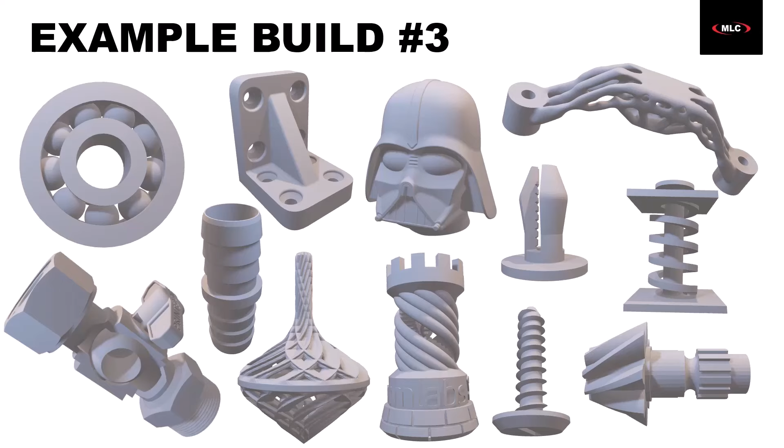In our case, this happens occasionally if we end up with a bunch of excess powder, or we need to come up with a bunch of demo parts to give away for an event or something like that. But in the real world, it may happen where you're in the shop and you have requests for a bunch of random parts, or you have some type of 3D printing shop where you sell these things directly, and all the requests come in for these different parts, and so you need to lay out a bunch of stuff at one time. And so here's a quick way that you can do that and get it all set up very quickly and easily.

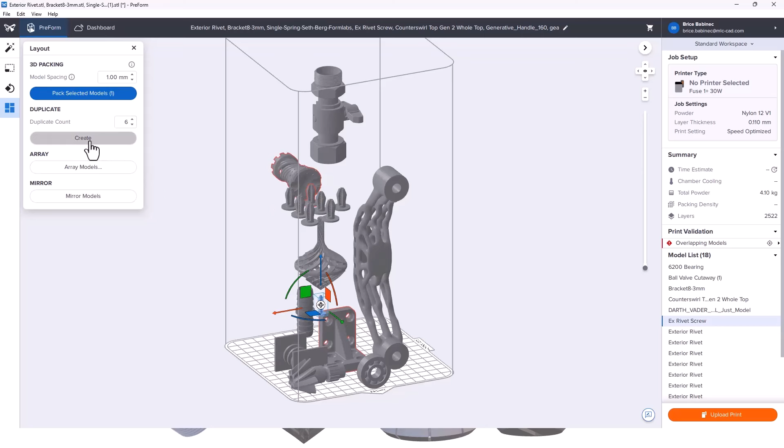So in this case, I just dragged and dropped all of these STLs into PreForm, and I can come in here and I can start creating duplicates of maybe the parts that we need a couple of. So in this case, I'll create a couple of these guys. Maybe a couple of these generative handles.

This thing is pretty cool. It's like a print in place piece. These rooks are very interesting. This pipe fitting here. Create a handful of those.

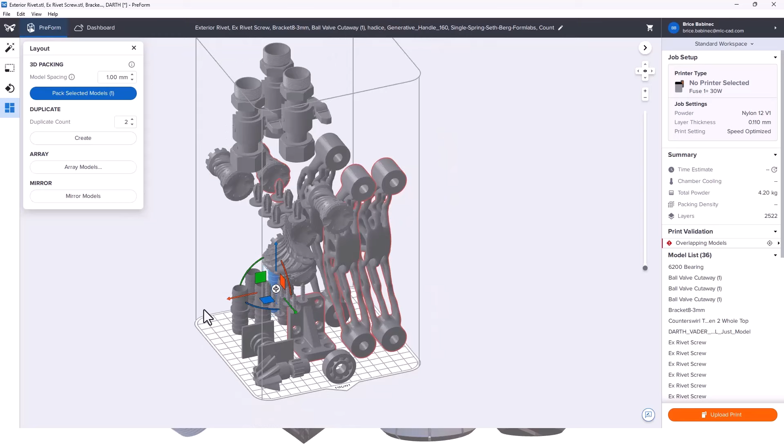And then at the end of the day, I can come in here and I can just select all of these parts. And there's this built-in button where I can just pack everything together 1 millimeter apart. And so a lot of the times if you're in production, you want everything oriented the same for consistency. But in this case, we're not too worried about that. We just want to kick everything off and let it print.

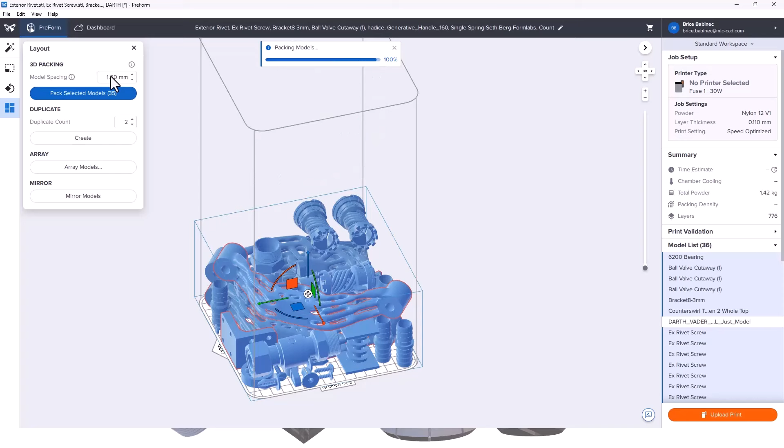And there we go. We've got this thing packed way down into this tiny little section here, and we're pretty close. We've got 25% packing density. So if we wanted to bump that up, we could just keep adding some of these smaller parts and letting it repack, or manually kind of sliding them in wherever they fit.

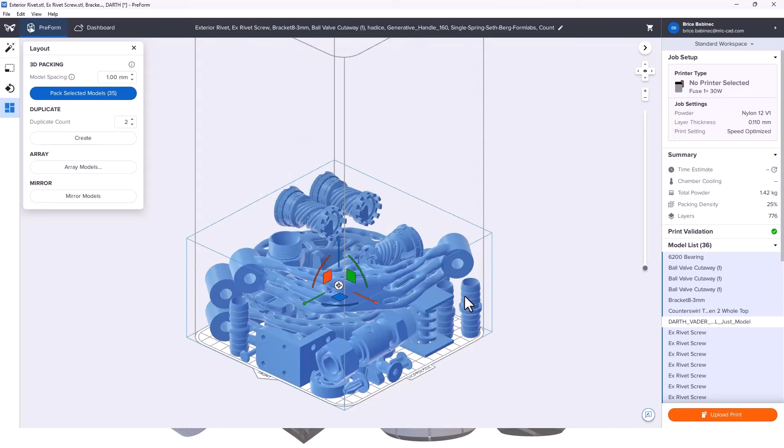So just a cool example to end it off, and to show one of the last really interesting tools that we can use here. So feel free to stick around if you have questions.